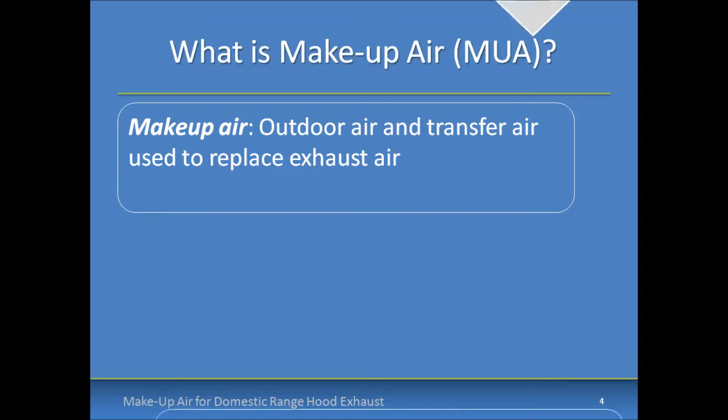So what is makeup air exactly? I'm guessing you have some understanding of that if you're on the call today. Based on paraphrased definitions of the 2015 International Mechanical Code, which has the most comprehensive definitions out of any of the model codes, makeup air is considered outdoor air and transfer air used to replace exhaust air, which leads us to the next question: what is outdoor air?

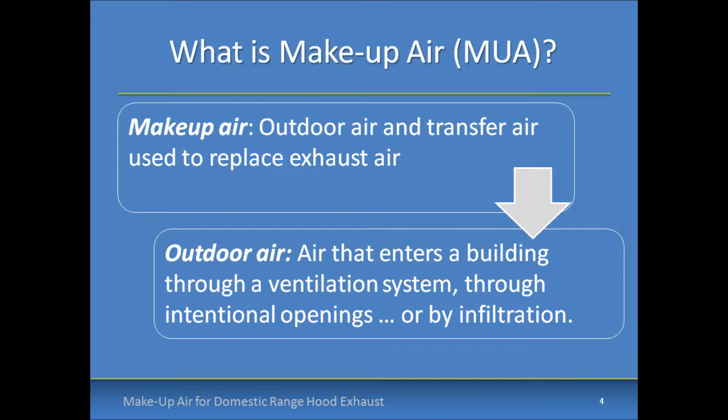Outdoor air is air designed specifically to enter the building through a ventilation system, through intentional openings, or by infiltration. So outdoor air can be intentional or unintentional in its entry into the building. When we talk about how it flows into the building, there are intentional openings that we have, such as a makeup air damper that was designed specifically for this application.

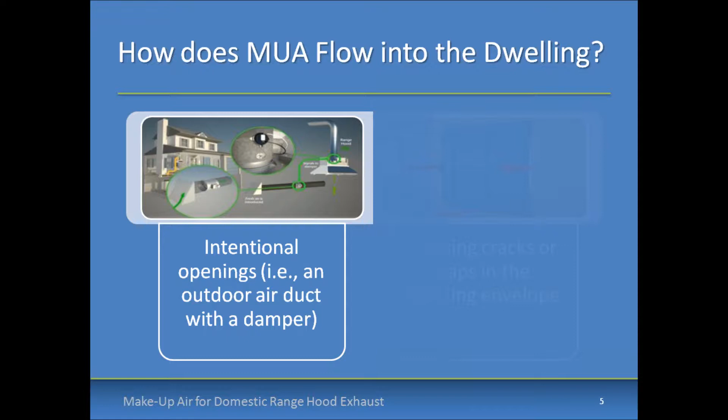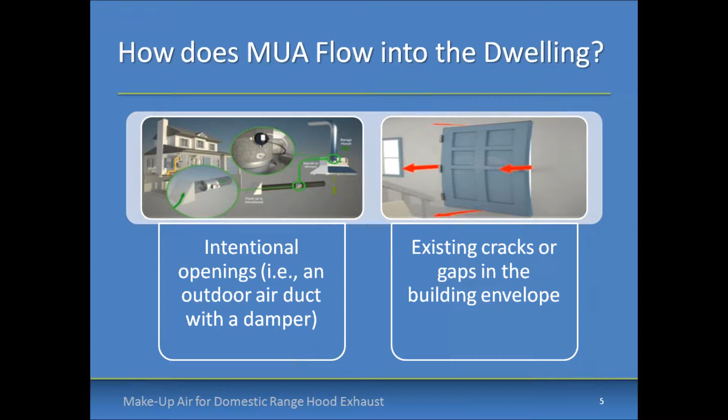That could be integrated with the range hood. And then you have cracks and gaps that exist around doors and windows and other openings in the building.

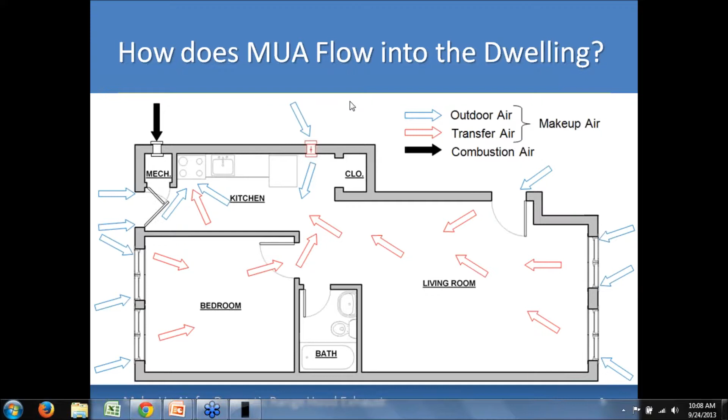And transfer air, meaning air can enter from other spaces in the house that communicate freely with the kitchen range hood and flow into that area based on pressure differentials and natural movement of air. I also have combustion air called out here with this black arrow directly into the mechanical room, and just wanted to point out that that's definitely different than makeup air. We want to keep those separate in general to ensure that the mechanical equipment has sufficient combustion air for its needs.

So another poll for just a second here is, why provide makeup air? I'd like to see some feedback from you on this and what you think as an audience. We'll provide some more information on this in just a second, but just wondering what everyone out there thinks are the reasons to provide makeup air.

Provide makeup air, you've got to meet code requirements. If you're a builder or contractor, you're acutely aware of that. It's important to minimize the chance of excessive depressurization, which if unchecked could lead to backdrafting of combustion appliances, extinguishing of pilot lights that might exist on old combustion appliances.

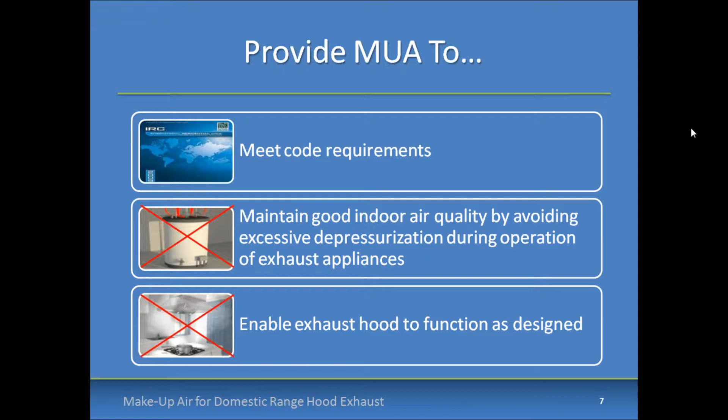Underperformance of range hoods would be another problem that could result from depressurization if makeup air isn't provided in sufficient quantity. Exhaust and sewer gas reentrainment is another one as well. So basically, we want to provide makeup air to ensure that combustion appliances and exhausts are in a good position to operate as designed, assuming, of course, that they're installed correctly.

Unless the building's exhaust and supply flows are perfectly balanced at all times, some level of depressurization is likely to occur when the exhaust appliance operates. So what we're trying to do here is not eliminate depressurization entirely, but to keep it at an acceptable level.

Based on recommendations from the Building Performance Institute, the maximum acceptable depressurization can be determined as a function of the type of combustion appliance. The most common metric used to measure depressurization is the Pascal. For those not familiar with Pascals, 25 Pascals is equal to 1/10 of an inch of water column, so that gives you the conversion.

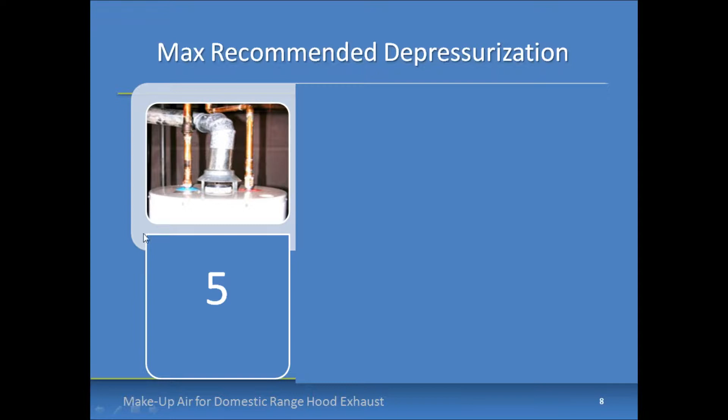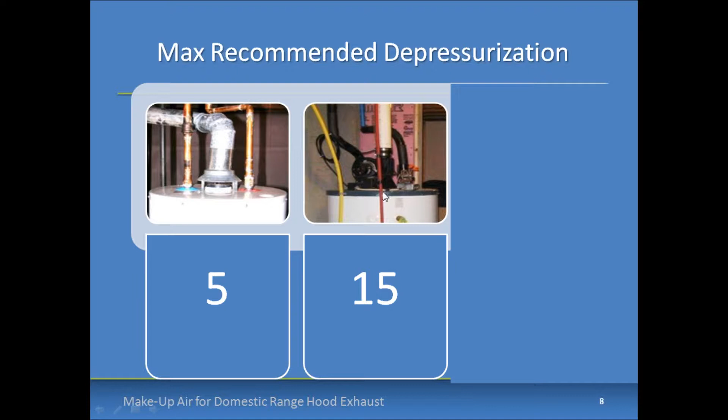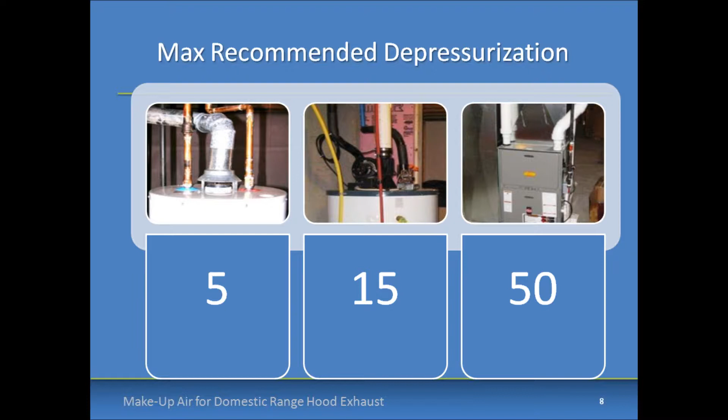For natural draft appliances, shown here on the left, a maximum depressurization of 5 Pascals is recommended. When dealing with mechanical draft appliances, like this fan-assist water heater, a maximum depressurization of 15 Pascals is recommended. And for direct vent or sealed combustion appliances, a maximum depressurization of 50 Pascals is recommended. So 5, 15, and 50 are the numbers to keep in mind as we go through this for new construction where these appliances are individually vented.

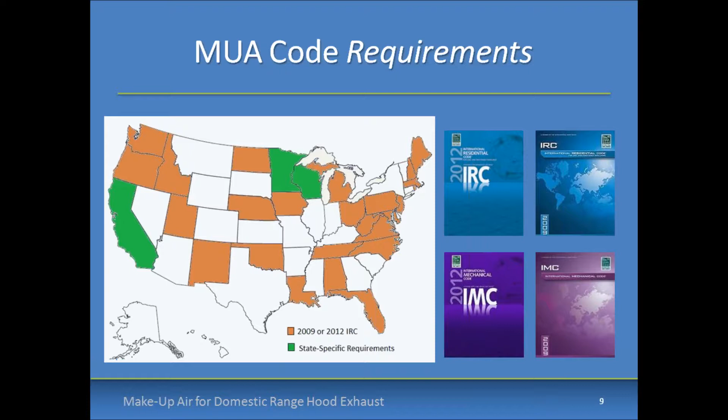So let's get into makeup air code requirements. Within this webinar, we'll focus on the code requirements of the 2009 and 2012 versions of the International Residential Code, the most widely adopted model code in the nation. You can see here on this map where it has been adopted statewide. California, Minnesota, and Wisconsin have state-specific makeup air requirements that we're not addressing today, but these other states have very similar requirements.

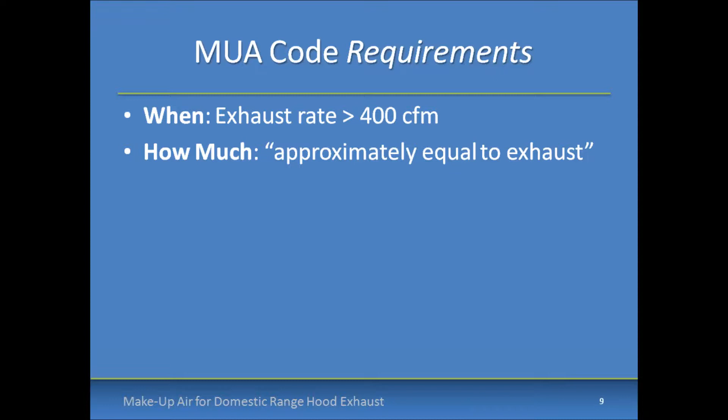The IRC and IMC, International Residential Code and International Mechanical Code, requirements for domestic kitchen range hood makeup air are virtually identical and include three basic components. First, when to provide it, which is when the kitchen exhaust rate exceeds 400 CFM. They also specify how much to provide, which is makeup air approximately equal to the exhaust. And what's required from a hardware perspective is a means of closure automatically controlled to start and operate simultaneously with the exhaust system.

So that's what we're looking for here, and all of these requirements can be met by specifying a motorized damper. You're seeing a picture of a Broan solution in the right-hand corner that's sized to provide the required amount of makeup air when open during operation of the range hood.

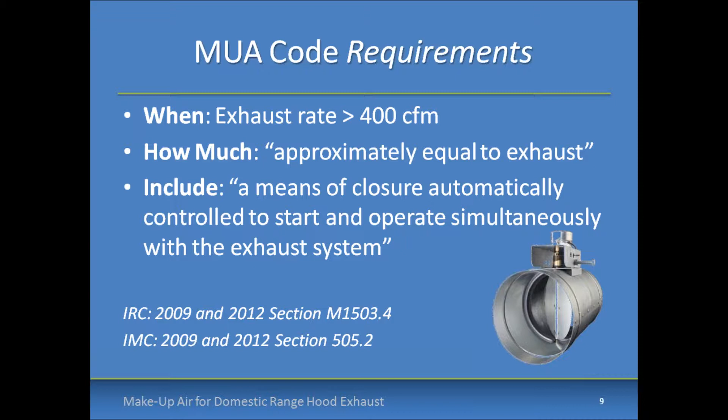If the makeup air damper is properly sized, the solution doesn't have to be a fan-powered solution. It can just be a passive solution that automatically operates simultaneously with the exhaust system.

So let's talk about gravity dampers for a second. One question that we hear from some professionals is, can I use a gravity damper to comply with the code? And in short, the answer is no for several reasons.

First off, they're not approved by code because they can't be automatically controlled to open with the operation of the range hood. Secondly, they're generally not listed and labeled, so it's hard to tell what pressure differentials they'll operate at.

We reviewed about 30 products from 7 manufacturers that are available through the nation's largest HVAC distributor's website of gravity dampers, and of these, only 7 products were provided with data on the pressure differential at which the damper would begin to open.

And of these, the average pressure differential required to operate them was 17 pascals, which is over 3 times the recommended depressurization limit for natural draft combustion appliances.

So just not a good solution from that perspective. And finally, industry sources like ACCA Manual D and BPI note that properly vented combustion equipment can backdraft at very small pressure differentials.

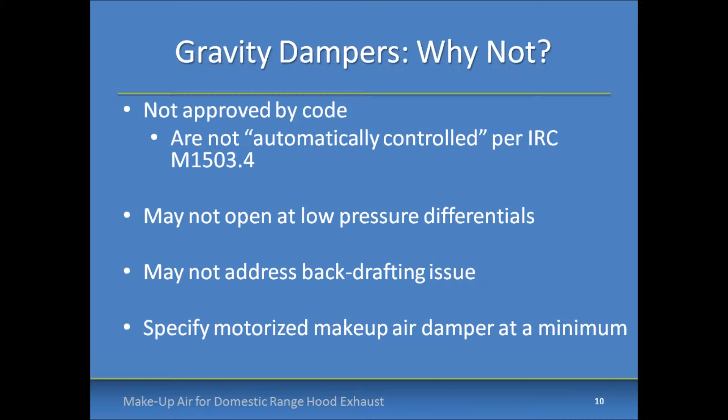Like 5 pascals or less, such as we just mentioned. So backdrafting can be a byproduct of specifying gravity dampers where you're not sure which pressure differential they'll actually operate at.

Here's a picture of a gravity damper that came from a real install back in 2000. And you can see the canvas hinge here with some rivets.

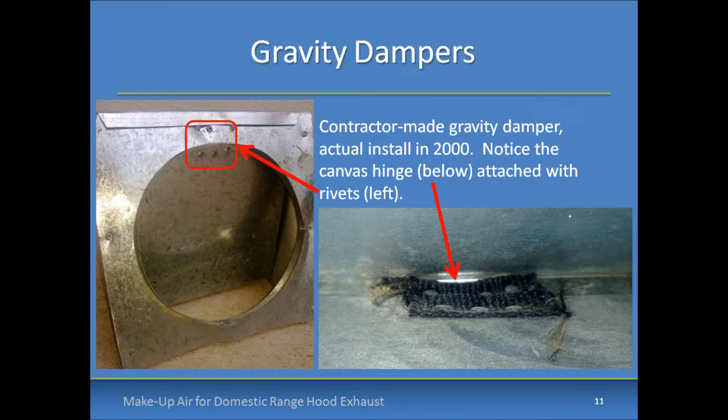Basically, gravity dampers can come in all shapes and all sizes and all varieties. So you really can't have a guarantee that the gravity damper is actually going to open when it's needed.

So many of you are aware that while today's webinar focuses on the current regulations, we know that the codes are always changing through public proposals, which are not always for the better.

And despite the reasons that we gave to disapprove gravity dampers for range hood makeup air, there is a proposal to approve gravity dampers that's advanced past the first round of the 2015 IRC code development process.

So if you're a code official, you can vote to disapprove gravity dampers at the public comment hearings next week in New Jersey. So for the 10% of you out there that might be headed to New Jersey next week, we just ask that you consider that when you're at the hearings.

So let's take a break from the regulations for a second here and look at, in the case that if you don't have local code that requires makeup air, what are the manufacturer recommendations for makeup air?

So Broan, NuTone, and Best recommend makeup air when any of these situations occurs: when the exhaust capacity of the range hood exceeds 300 CFM, or if the home is considered to be of tight construction or well air sealed.

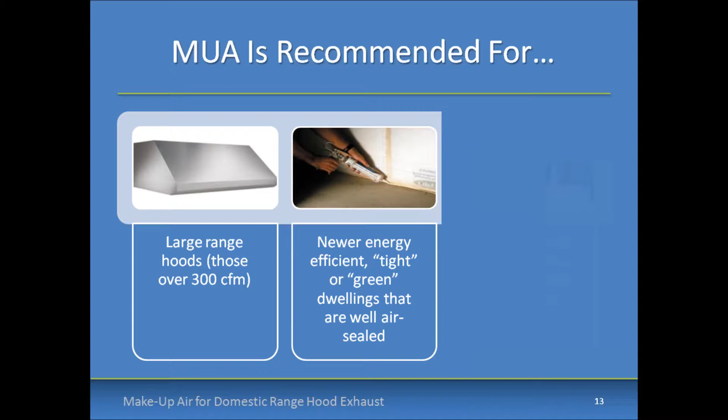Then that would be another reason to provide makeup air. Or if the dwelling has natural draft space heating or water heating appliances that are located indoors, that's of course another reason to provide for makeup air.

So let's get into some installation configurations here, and just some typical installation configurations that are permitted by code and that are options for installers.

The first installation option that we'll look at here is interlocking the central fan with the operation of the kitchen range hood and the makeup air damper. If those three are coordinated through a system of relays and controls such that when the hood turns on, the makeup air damper opens and the central fan turns on.

And the makeup air duct is ducted to the return trunk of the central air handler, then you have a few advantages here.

You can increase the flow capacity of the makeup air damper by increasing the pressure differential over that outdoor air duct, so you're actually pulling in more outdoor air with the assist of that fan.

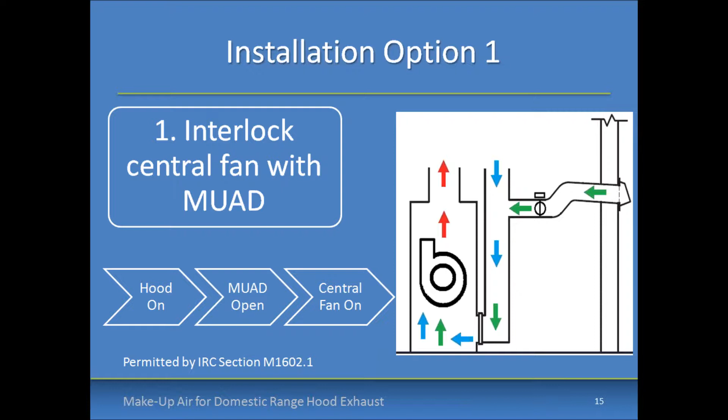You can also promote mixing of the makeup air, so there's a bit of tempering before it reaches its final destination in the kitchen, and provide for a little bit more comfort for the occupants potentially, depending on the severity of the climate.

A second installation option would be to just duct the makeup air damper into the return trunk of the central duct system, but not interlock the operation of the central fan.

So a little less complicated than the first installation, a little less costly, but you have less tempering at this point than you would before as far as running the air over the heat exchanger.

But you do have some mixing going on of the air before it reaches its final destination in the kitchen.

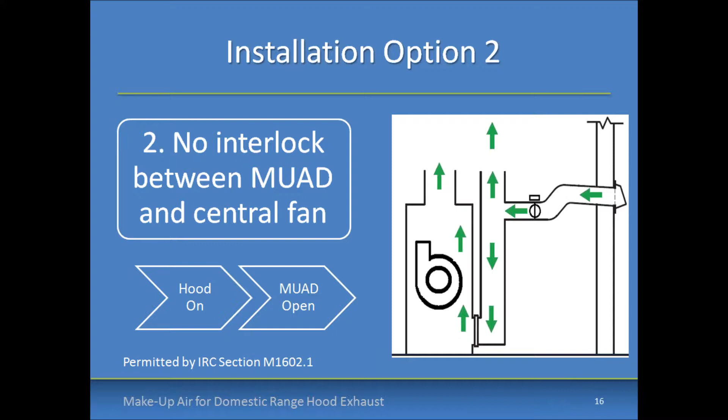A disadvantage is that less flow is provided because you don't have that central air handler to provide that boost that's necessary. The third installation option is routing the makeup air damper to the interior register,

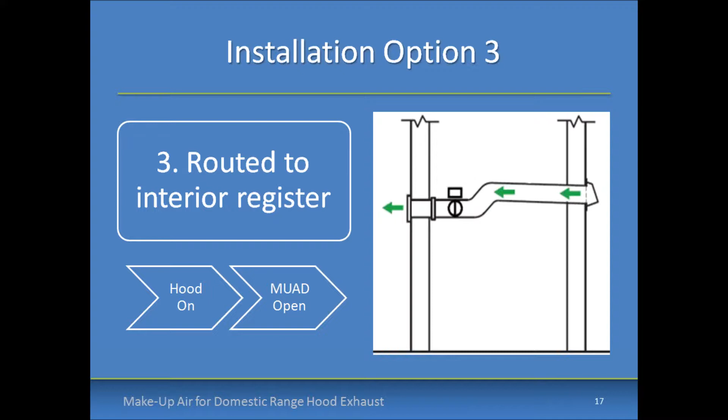and not integrating it with the duct system at all. This is the simplest code compliant option, but it doesn't have the advantages of tempering or mixing. If you're using this option, Broan recommends that you don't dump the makeup air right on top of the range hood, because that could result in short cycling of the exhaust air instead of exhausting the actual air that you want.

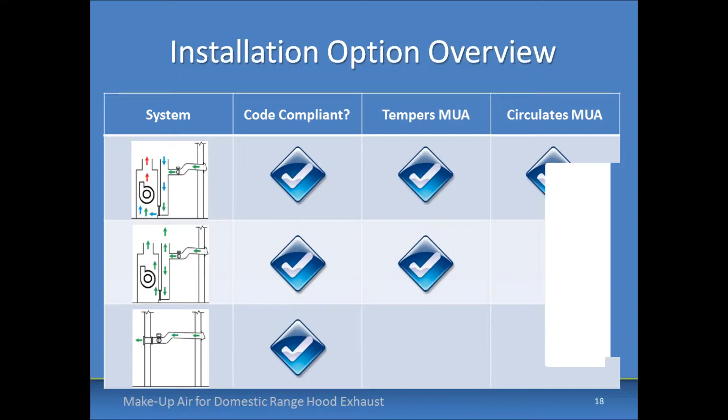So just a brief overview here of the three different options that we identified and the advantages of each. You can see that the central fan integrated solution provides the most advantages, but all these solutions can be used for code compliance.

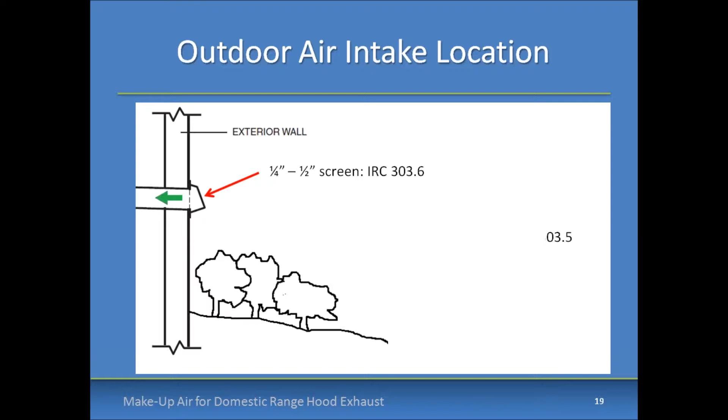Another thing to think about when installing the solution is the outdoor air intake and where that's going to be. These are just common requirements within the code that address issues such as screening, clearance, and also location of the makeup air that's being introduced. So don't forget about those code requirements when you're specifying the system.

So a little more involved here for you architects and engineers on the call. We're going to address some makeup air theory and building science considerations, which hopefully is a little bit of interest to the others of you on the call as well.

So when you're talking about a makeup air solution, we've seen that the code has some very basic requirements for makeup air, but we've also covered several considerations that should be taken into account in designing a makeup air solution, such as the type of combustion appliance and its ability to resist negative effects of depressurization. Is it natural draft, mechanical draft, or direct vent?

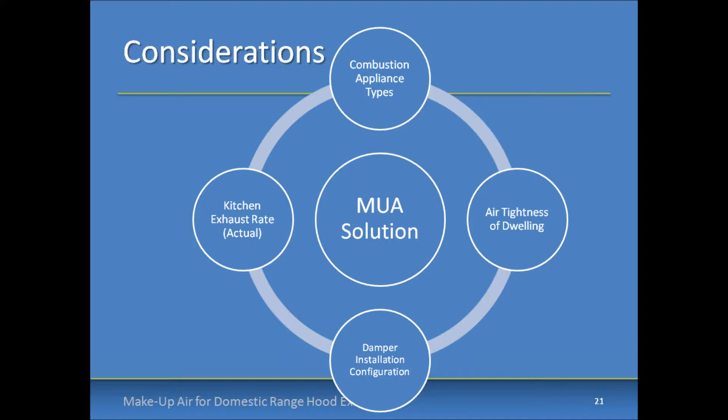Another question is the air tightness of the dwelling. How much infiltration is available for makeup air, and how much needs to be provided through dedicated openings through the building envelope? What about the installation configurations and the boost that you could get through integrating this with the furnace? And the actual kitchen exhaust flow as opposed to the nameplate rating.

The fan may be rated, let's say, at 1,000 CFM, but once you get the ducting in and all the elbows, you might not be providing that total flow.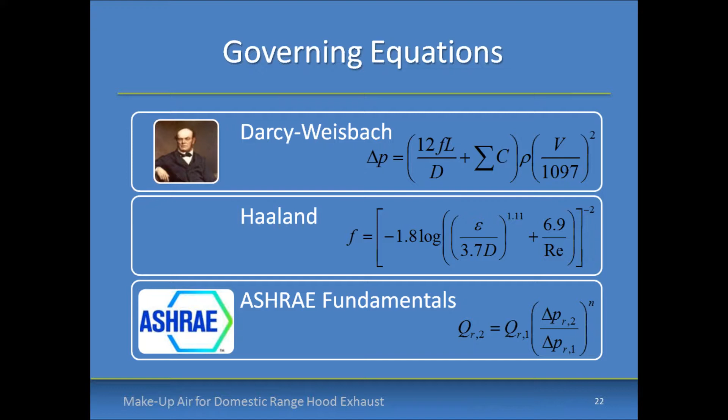So the governing equations that are out there that were used in developing this tool can get a little complicated and a little involved. So for the time being, we're just going to leave the theory to Darcy, Weisbach, Haaland, and ASHRAE. All you have to know is that the Broan makeup air tool uses these equations so that you don't have to. However, if you're an architect or engineer and want to actually size these ducts on your own, you can reference ASHRAE fundamentals, and they have a lot of great equations that can be leveraged. But just know that the basis for this tool is grounded in engineering design.

So let's look a little bit more here at the Broan and Best Makeup Air Specifier tool, which is a proprietary tool for Broan, Best, and NuTone products, but can also be leveraged for other kitchen range hoods as well that come from other manufacturers for code compliance. And I'll get into that a little bit later here.

One of the most difficult parts of complying with the makeup air requirements of the IRC is sizing the makeup air intakes, and then of course demonstrating to code officials how the design makeup air flow is approximately equal to the exhaust flow. So Broan, NuTone, and Best have developed a freely available online tool to help building professionals with this step.

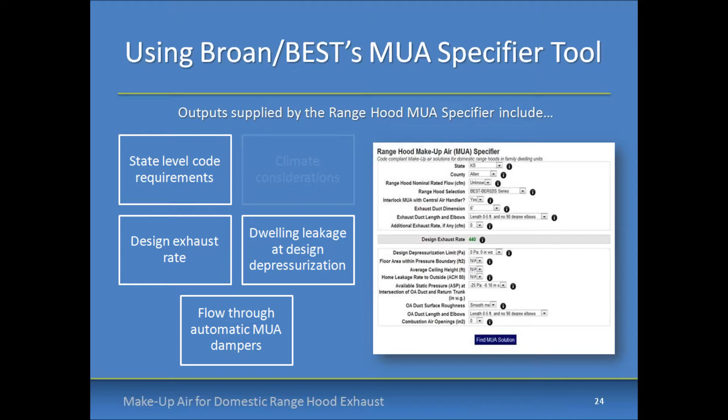The tool is going to overlay the engineering equations that we saw earlier with user-specified design criteria, and a state-level code adoptions database is integrated as well. And with all this overlay and this engineering design, we can develop specific code compliance solutions with rich outputs and documentation. So again, all these considerations go into the tool.

So right now we're going to go ahead and step out of the presentation for a second, and we're going to then step into the Makeup Air tool.

So you should be able to see now Broan's homepage on your screen. And from this homepage, you can select on the top toolbar here, Specifier Tools. So I'll go ahead and select that. And on the left-hand side here, you see Makeup Air tool is an option. There are a couple other tools that Broan has as well for code compliance of mechanical ventilation systems.

This is called the Range Hood Makeup Air Specifier, and you see a lot of legalese and introductory text here about the different systems and just a background on the tool, kind of a primer on what it's supposed to do. But we'll skip that for now and just go ahead and select the state that we want to design in.

I'm selecting New Jersey in this case because that's where the code hearings are in another couple weeks, so we'll try to get a solution that's directly applicable for New Jersey.

As you go through this tool, you'll see these eye icons, and these are informational icons that you can select to get more information on the specific input to figure out what exactly the tool is asking for here.

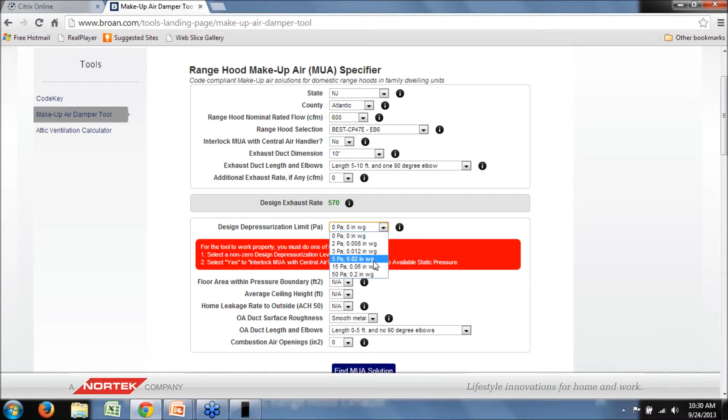So let's go ahead and select a non-zero design depressurization level. And if you recall before, we had the 5, 15, and 50 as the 3 major choices. And let's assume that we've got a naturally vented water heater. So in this case, we'll select 5.

If you don't recall the guidance provided before, you can hit this information icon and see that these are the BPI recommended depressurization limits based on the type of combustion appliance. So that resource is always available for you.

Next, we want to enter the square footage. Let's say it's a standard new construction, about 2,500 square feet. The average ceiling height, about 9 feet.

These inputs matter because they're going to tell us how much infiltration is going to be available through building leakage. A measure of infiltration is the ACH 50, the air changes per hour at 50 pascals. You can get this number through a blower door test, or if you don't have it, you can make a conservative estimate. I'm going to choose 3 ACH 50 in this case, assuming it's an energy efficient, tightly built home that's compliant with the latest 2012 energy code. So we'll go ahead and select 3.

Then we have to know the characteristics of the outdoor air duct. Are we using flex duct? Are you using smooth metal duct? That's going to make a difference on the resistance to airflow through there and how much air you can actually expect to get. A lot of engineering calculations go into this tool, but we try to keep the inputs as simple as possible. Seems like a lot the first time through, but once you go through this a couple times, it becomes pretty routine.

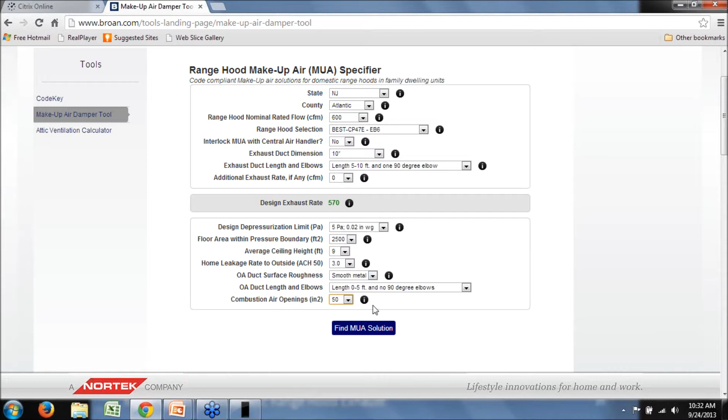So let's go ahead and take a look at our solution again. We've got a 600 CFM range hood for our inputs, exhausting about 570 CFM, which is what we're expecting based on field conditions. We're saying that we'll let the building depressurize to 5 pascals, and we've got our parameters entered to figure out the infiltration contribution. We've got our combustion air openings entered as well.

So now we'll hit find makeup air solution. And as you can see here, this is not going to be a palatable solution for most builders or contractors out there, if you're looking at 5 8-inch dampers to provide the makeup air required. The good thing about this tool is that you don't have to stick with this number. You can go back and change your inputs to come up with a more acceptable solution.

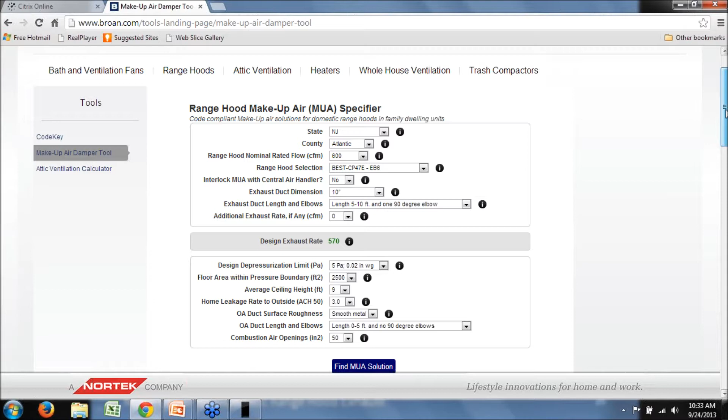So based on the tools we have here, one of the biggest changes we can make is to first interlock the makeup air with the central air handler. Let's go ahead and say yes to that. And if we're going to interlock it, we know that we can get more flow through.

So we need to estimate the available static pressure down here at the intersection of the outdoor air duct, or the makeup air duct, and the return trunk. Basically, how much suction do we have when the fan's operating that we can rely on to provide this makeup air? So let's say we have about 0.15 inches water gauge, or 37 pascals, available to pull that air through.

If we keep everything else the same and then we hit find makeup air solution, you can see that we're down to 2 makeup air dampers required for this solution. And those would be 2 8-inch dampers.

If you're thinking that's still not acceptable and you want to get down to 1 damper, well, you can look at other options as well. Like, what about the design depressurization? 5 pascals is pretty conservative.

And if you go ahead and change out your appliances, say this is a new build and you're considering all your design up front, you could put in a mechanical draft water heater and a mechanical draft furnace or direct vent. Always select the design depressurization limit of your weakest link, your water heater or your space heater.

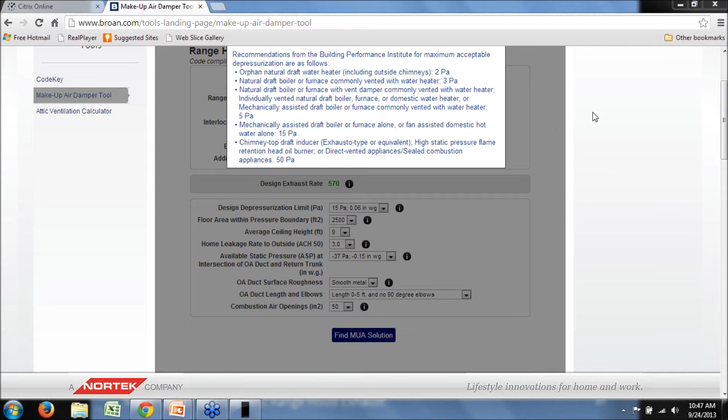I've got another comment here. In terms of related makeup air factors to consider in the home, it would be helpful to address two other items: identifying any competing exhaust devices in the home, and practical considerations for tight homes with open fireplaces. The first could be addressed through the additional exhaust option available within the tool, but that's another great suggestion. For open fireplaces, depressurization can result in entrainment of combustion products or particulate matter in the flue, so those are considerations the designer should take into account when selecting the acceptable design depressurization limit.

Got a question from Paul Raymer here. How does the exterior hood or termination fitting work into the design exhaust rate? The way the tool is set up is that it assumes a constant value for the equivalent length for the end cap. We had to make a call on how many inputs to have and what assumptions to make. While there is definitely a difference in the performance of exhaust caps and the flow let through, we decided to go with just a standard assumption that's integrated into the tool, basically hardwired.

Got a question from Alan saying, how does the tool interact with HRV and ERV systems? The answer is that HRV and ERV systems are typically considered balanced systems, so they should be able to provide the exhaust and supply streams they're rated for. They have their own fans that can regulate that, but the higher the depressurization of the home, the harder the HRV or ERV has to work to overcome resistance on the exhaust side. On the supply side, they might actually receive a boost if depressurization helps draw more air from outside. The tool doesn't specifically say you should tweak your HRV or ERV this way—I'd assume there's some impact, but we haven't quantified that at this point.